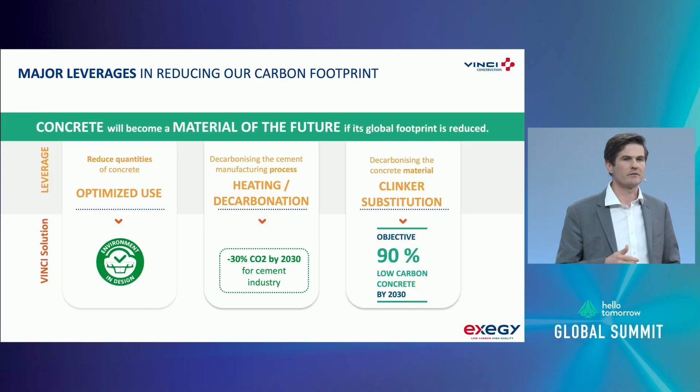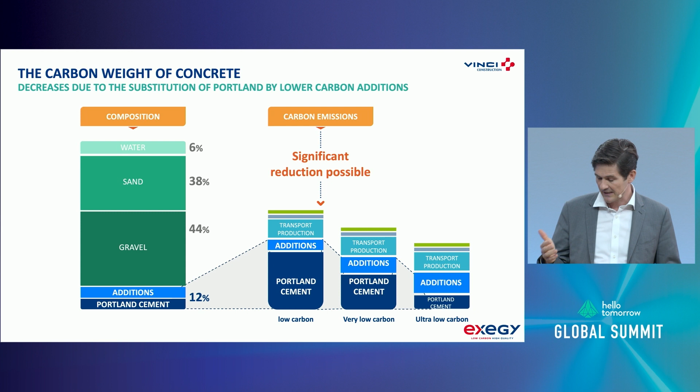And finally, working on the concrete itself, it's possible to replace the clinker, the Portland cement, inside the concrete and to substitute, and that's the reason why in Vinci Construction we committed to 90% low-carbon concrete on all our construction sites worldwide by 2030. So going back to this carbon footprint, I will talk about low-carbon concrete. What are low-carbon concretes? It's easy. It's to substitute the Portland cement with additions, and all these additions have lower embodied carbon than cement. As a result, you have low-carbon concrete. The more addition you have: low-carbon concrete, very low-carbon concrete, ultra-low-carbon concrete.

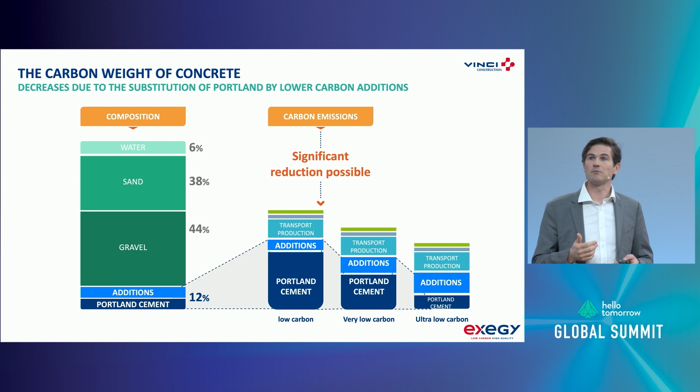By doing this, you take any concrete in the world, you have the embodied carbon, the compressive strength, you apply a specific standard. It's not a true definition for everyone, but this is the definition that we use within Vinci in order to measure our trajectory towards this 90% objective in 2030. Feel free to use it. This is on our website. It's not protected. Use it, okay?

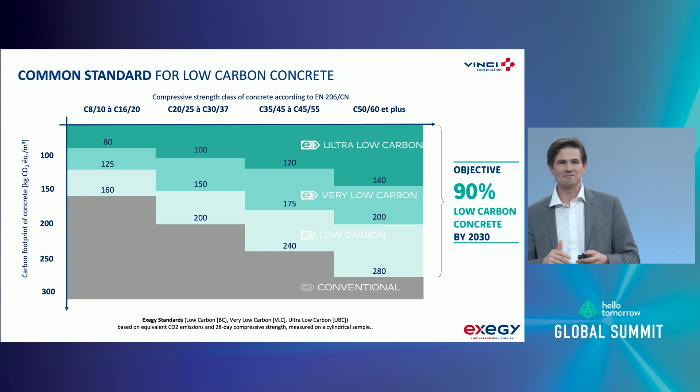So now, what are these additions? These additions, I told you, substitute the cement. I will tell you something that you can share. Part of the low-carbon concrete, we've done this for many years without knowing that it was low-carbon. In the suburbs of Paris, at the beginning of the 20th century, they were using GGBS. GGBS is a byproduct. It was a waste; today we call it a byproduct from the steel industry. It means that when you produce steel, you produce GGBS, and this GGBS can replace part or all of the Portland cement.

It's the same with fly ashes. Fly ashes, we've used them for many years. They come from the power plants, and this is also a waste that was able to substitute the cement in concrete. The issue is that of these two products, there will be less and less. It will not be enough to fully substitute the Portland cement. And that's why we have to explore other solutions.

And the good answer is it's still possible to do this without GGBS, without fly ashes. It's a mix of limestone filler and ultra-fines. And these ultra-fine products are calcined clay, metakaolin, silica fume. All these products are available. And also very important, they are lower carbon than cement. And they are available all over the world.

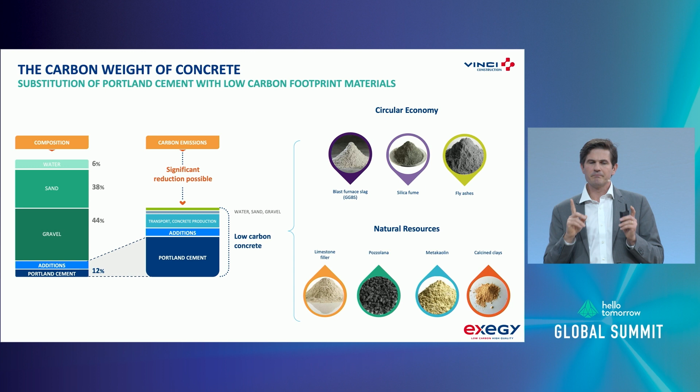So the future of low-carbon concrete is really on this type of solution. So now be ready. Until now, this was very, very simple. This slide is a bit complex, but if you understand this slide, you fully understand the issue about low-carbon concrete. So there were two processes, the cement process and the concrete process.

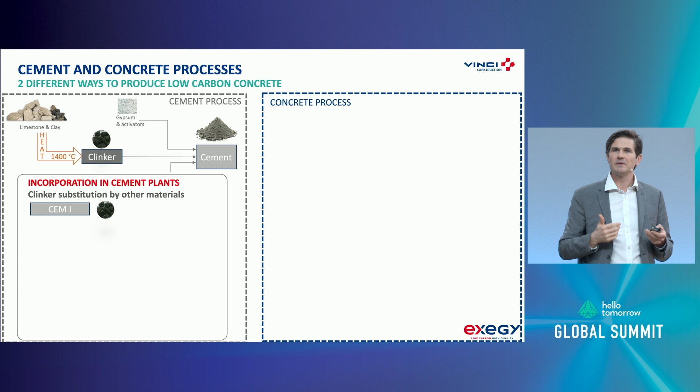The cement process: to produce clinker, you take the clay plus limestone, you heat, you have the CO2 generation, you add gypsum, and you have cement. In the cement plants, you have the clinker, and it's possible to have all this substitution at the cement plant itself. And this is what we've done. For many years, we had this type of cement, which was already low carbon, and it was cheaper at that time. So we use it, it's low carbon cement.

And the cement industry is now pushing the limit with other additions in order to have less and less embodied carbon inside, and even with disruptive, innovative solutions, using this limestone and the calcined clay I was mentioning before. So it means that they are already in this direction towards this target zero. I will come back to this later on.

The concrete itself: you take the cement, you take water, gravel, sands, you have the concrete. And depending on the low carbon or very low carbon cement that you use, you have a low carbon concrete, and this is what is mainly used today.

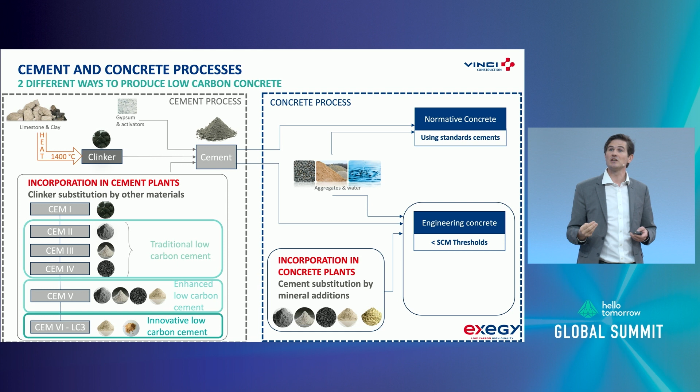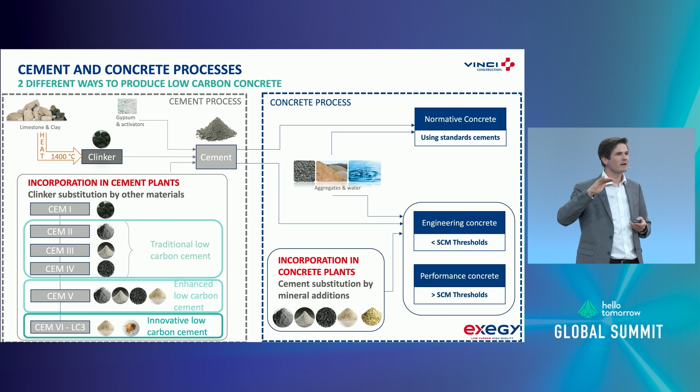But it's also possible at the concrete plant itself to put the additions, the slag, the fly ashes, the limestone filler, the metakaolin, and to produce engineering concrete or even performance concrete, which are compliant with the concrete standards, at least in France, and we push to have this compliant everywhere in the world because this is one of the solutions to expand and generalize low-carbon concretes. If you understand this slide, this is crystal clear for you. This is the solution today to massify. And all of this is compliant.

But less clinker, less carbon, but poor early-age performance. And that's why it will take longer setting times, it has an impact on planning because of the formwork removal time, and there is also an impact when it's freezing in winter. This concrete is a bit lazy, we say.

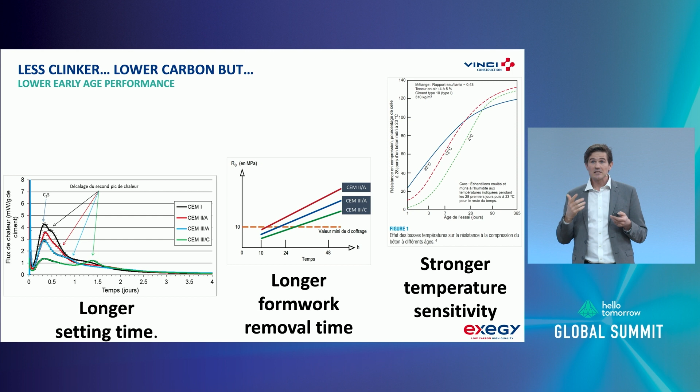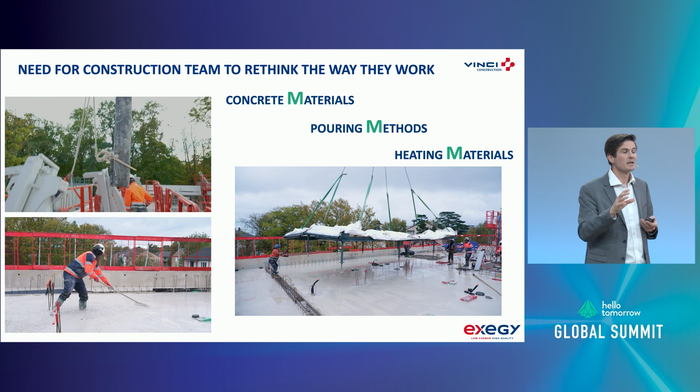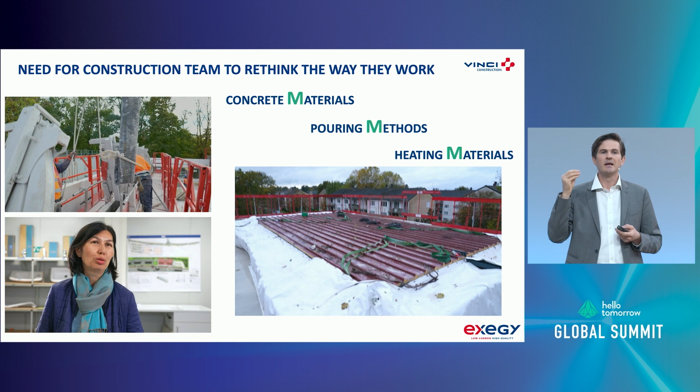And that's why we, Vinci Construction, as a construction company, have something to say: concrete materials are good, but all the value chain of construction needs to adapt its pouring methods, the way we design projects, and also the type of materials that we use is very important. And this is what we've done.

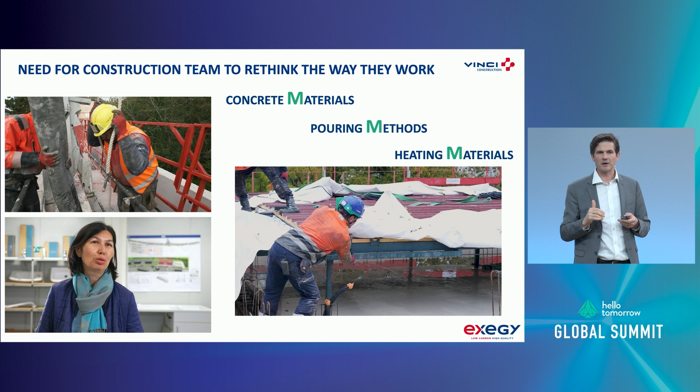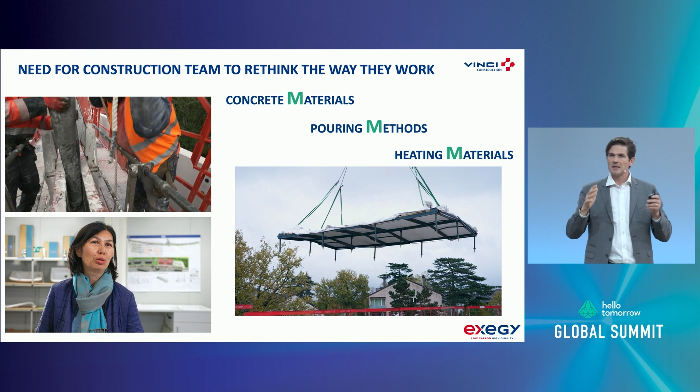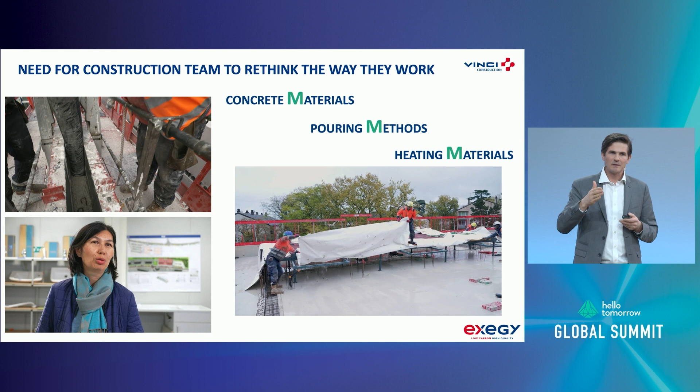This one is an ultra-low carbon concrete near Paris. And you see that the construction sites developed specific methods in order to maintain the heat. They've developed specific heating formworks because this was the solution to use this type of product during winter. It works. This one is a pilot. This is our Formula One. But it's a demonstration that we, as a construction company, can make it.

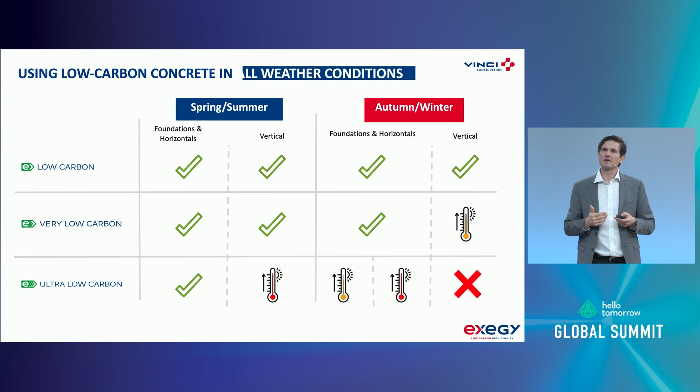And the lesson is that using low-carbon concrete, there is no impact. No impact on method, no impact on materials, no excuse not to use low-carbon concrete. Go for it. Very low carbon, it's more difficult in vertical structures during winter, but if you heat the water, it works. Ultra low carbon, that's another story. We are very proud. The athlete village in the north of Paris for this summer is in this specific material, but that's really part of the innovation.

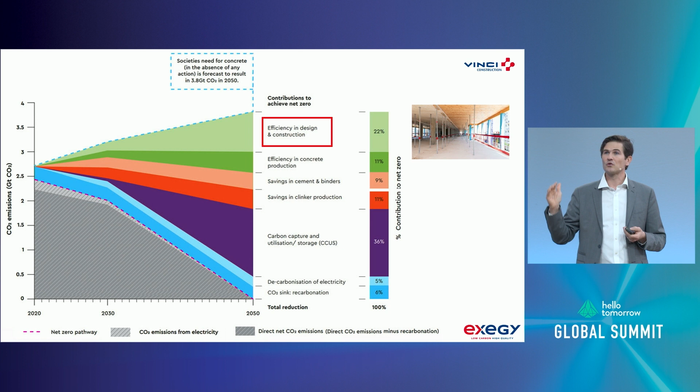Now, let's talk about the trajectory to target zero. We have this commitment, and we have our contribution. The first one: I will talk about the efficiency in design and construction. I told you, the less concrete we use, the cheaper it is, but also it's better for the environment.

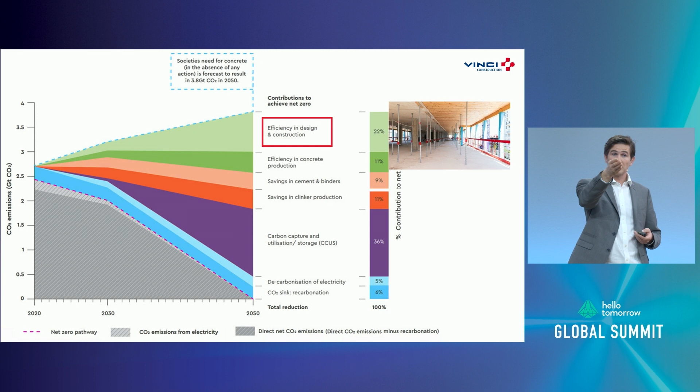But more and more, we will have a mix between concrete, low-carbon concrete, and timber. And this will be the solution to reach the thresholds imposed by the regulation, but also to reduce the impact of concrete. So very important, and this one is an example of ultra-low carbon with timber in the athlete village in North Paris. So that was the responsibility of the construction. The second one is the responsibility of the concrete and cement industry. And once again, they've already started.

When you look at Cemex in the UK, they invested in their cement plants in Rugby, where rugby was invented, I guess, to eliminate fossil fuel in their heating production. Lafarge in Saint-Pierre-la-Cour with Holcim, they integrate the activated clay solution in order to reduce their carbon footprint. And it's the same with Vicat. In Xeuilley, they also invested in this calcined clay production.

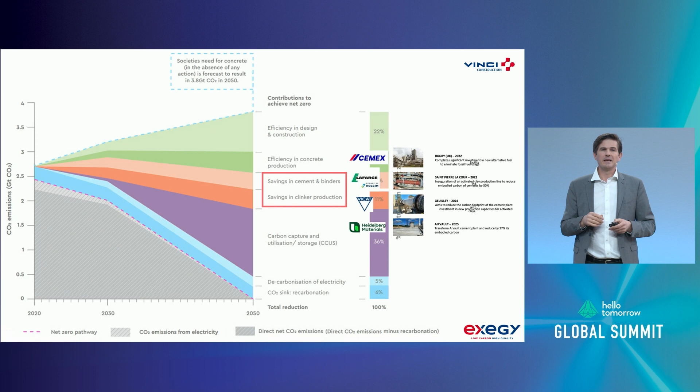And another project with Heidelberg, once again in France, is to transform and reduce by 27% its embodied carbon. So they are there, and they want to make this move, which is good. The second thing is, you see in purple, this is the big gap. And this big gap is carbon capture and storage.

And once again, we see this starting in Norway, Heidelberg Materials. They already invested, and I understand that by the end of this year, we will have this carbon capture, so zero carbon cement available coming from this cement industry. And closer to us in France, in Lumbres, EQIOM, in partnership with Air Liquide, also invested money into this carbon capture sequestration unit.

So this is promising. And just to say, I will not cover all the points. I only have 17 minutes. But just to say that if the construction, cement and concrete industry is working together, we can make it.

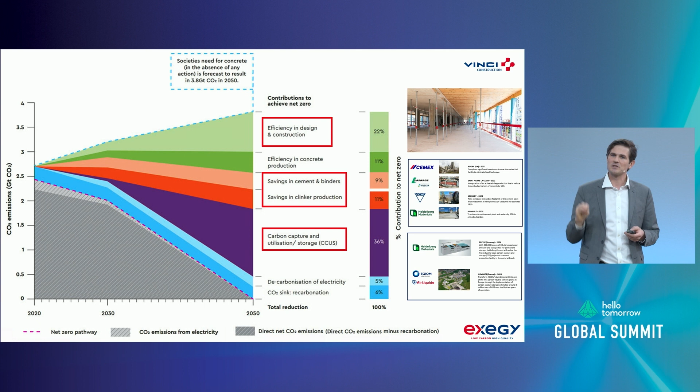Now, let's talk about the startups. We have a lot of new players, new entrants, some of them with a very long maturity, like our partner Ecocem, for example. But you have all these partners, Geoclay, Ecocem, Fortera, that develop new materials. These new materials are not necessarily compliant to the French concrete standards. So we have to work with them and make sure that they can express themselves. And that's very important. They are agile and they push the cement industry and even construction to act differently.

We also have the alkali activated binders, and with Ecocem, we've developed together this solution for the athlete village in North Paris. We have Neolithe, well known for waste fossilization. We have all the solutions to enhance the curing of concrete and even self-healing concrete. All of this is very detailed in the Hello Tomorrow report done with Leonard.